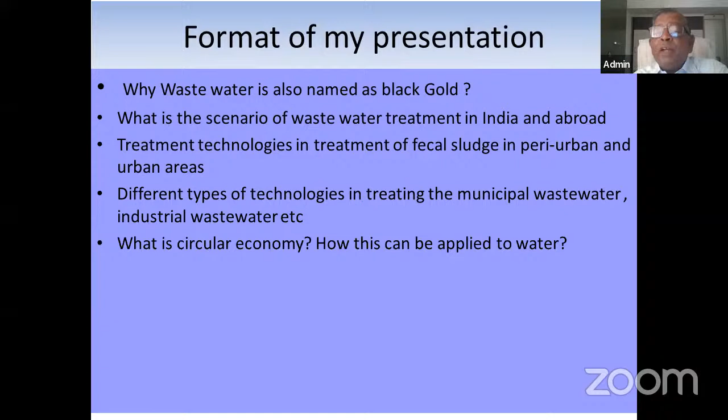So the untapped resources of wastewater: recovery of water, energy and phosphorus from wastewater. And case studies in India, USA, Singapore and other countries. I think I have just generally given you the gist of my presentation.

In this context it is necessary to understand what is the scenario of water, because water and wastewater go together. Without water there cannot be wastewater. In that context I have a few slides to show you the scenario of water, not only in India but all over the world, and how, in order to make good of this freshwater resource, wastewater can help us. I think that is the most important part of the whole exercise.

So let us understand: Mahatma Gandhi, as early as 1925, stated sanitation is more important than independence. You can understand how important sanitation is. Sanitation covers not only water but also wastewater and solid waste. These are the three important components of sanitation, which are really in a poor state of affairs in the Indian scenario.

So water is called liquid gold. Without water, nothing can exist, particularly living beings. Water plays a very vital role. Fresh water is more important because we need it for agriculture, industry and drinking water. So when water is called liquid gold, wastewater is called black gold. I think you are well aware of the water scenario.

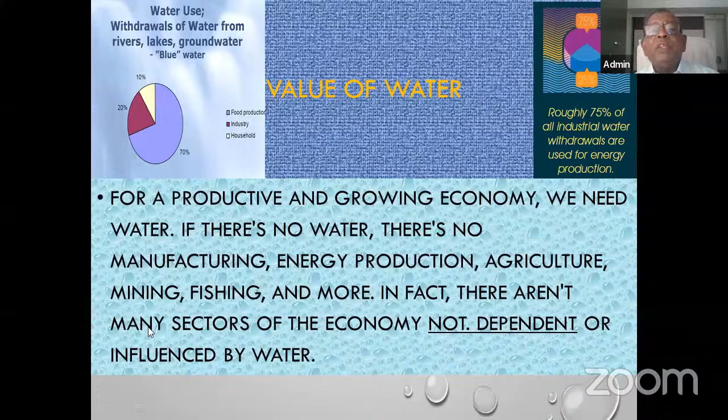Another important thing you can notice here is that in the industrial sector, roughly 75% of industrial water withdrawal is used by energy production. That means if 20% of water is used for industry, 75% of that 20% is used only for power generation. I think this is very scary. We have to reduce that usage of water. Perhaps you must have read a few years back that Cape Town almost managed to push back Day Zero.

Virtually, there was going to be day zero in the estimate when taps in the city could run dry. In 2019, after successful water saving efforts, they somehow overcame this day zero. See, that probably is a scenario in India, and we have seen that on many occasions. But in India, day zero has come and gone for residents in many parts of the country where taps failed long ago, and people have resorted instead to digging wells or buying water.

I think this is the scenario, and it is going to be. I think you must have read in papers: in Simla, virtually there was no water, and so many cities in India are lacking water. So let us come to the real sewerage system in India. Urban areas in India are almost invariably plagued with insufficient and inefficient wastewater facilities. That means, as I said, I will show you some of the scenario, wastewater is not being treated.

Even in Bangalore, this was only started late in the 1970s, and we have only provided primary treatment, and subsequently only in 85 we tried to have secondary treatment. Now things have straightened up, but over a period of time, wastewater has been given, in fact, a raw deal of not being treated. And today we are suffering for that.

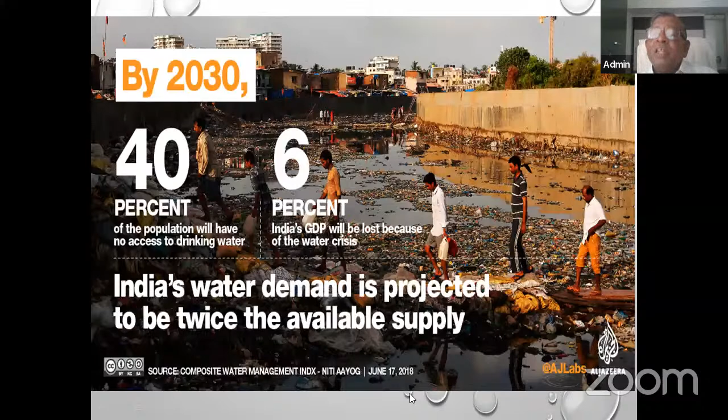Where do you get this water? That is what I am going to speak about now. The sources of contamination are point and non-point sources. What are point sources? Point sources are basically the domestic sector. If we don't treat wastewater and take it to a point and, without treatment, let it into the river, that is exactly what is happening from the domestic sector, and all industries are also a point source. We are just leaving it to the rivers.

Agriculture is a non-point source. Agriculture, forestry and fishing, this is again a non-point source. Runoff of rainwater is another non-point source. Storm water which precipitates on any urban area is carried away to the rivers with so much dust and all sorts of pollutants in it.

That is the non-point source. In addition, we have mining and quarrying, which is point source, and construction purposes. We are creating a lot of pollutants there too, and that is also a point source. So these are the areas where we are polluting the fresh water.

Resulting in all rivers in the country being in very bad shape. We have 5 important parameters where we classify rivers under A, B, C, D, E groups. None of the rivers fall in A, B, C group. They are all either D or E, because the DO content in rivers is very low compared to what is supposed to be in A, and the other parameters. So in that context, we have to seriously look at how this wastewater should not reach the rivers, so rivers become healthy.

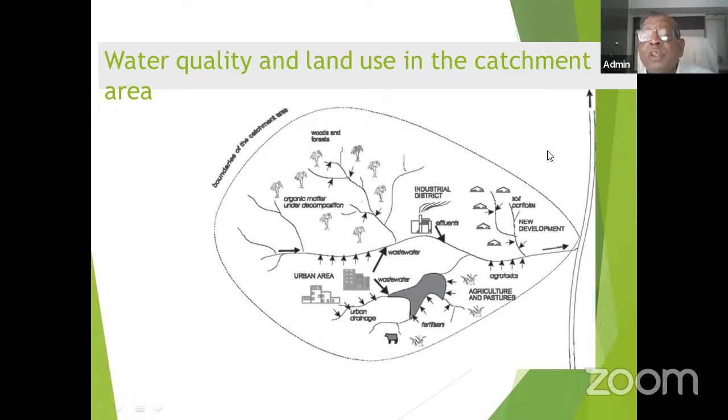Probably Ganga is doing something. I think for Ganga they have spent more than 2,000 to 3,000 crores in the last few years, and they are installing sewage treatment plants and also intercept and diversion networks.

Now coming back to the issue of how water from domestic usage - particularly groundwater or glacier water, which we are using, natural water - and even from the ocean, because most cities adjoining the sea have desalination. Nearly 121 countries have desalination projects. I think ocean sea water is becoming one of the water resources.

So the natural water utilized by municipal authorities - either for residential usage - is used for drinking purpose after treatment, and this drinking water again comes back as industrial and municipal wastewater. This wastewater is almost 80% of the water utilized, particularly in domestic, commercial, and industrial usage. And this 80% of wastewater has to be recovered.

Only then can we sustain water for the coming years. So how should it be treated? Treated effluent - we can have primary treatment, secondary treatment, advanced treatment.

With this, we can also go for repurified water - first treatment, second treatment, and then repurified water, even for drinking purpose. This has happened in many cities, and I am going to touch upon that. So this is the area where wastewater has to be recovered.

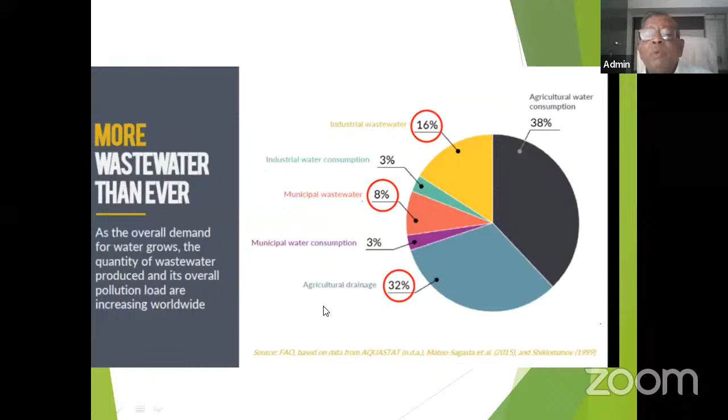Our water availability is fixed - it is finite. You cannot add one drop of water to the universe, or remove one drop. Overall, the scenario is we have a certain quantity of finite resource, and this finite resource has to be catered to more and more people. That is exactly what we have to seriously look at.

When you compare to other countries - Philippines is 1.4 billion, Vietnam is only 780 million, Laos is only 193 million, Cambodia is only 448 million, Indonesia is 6.3 billion. Indonesia is much worse, even though Indonesia is a small country - 6.3 billion.

This is a report released from several international companies together along with World Bank, on losses because of inadequate sanitation. The cost to India is 2.4 trillion rupees, equivalent to $53.8 billion lost - that means it is equivalent to almost 3 states' budgets. I think we must give this serious thought.

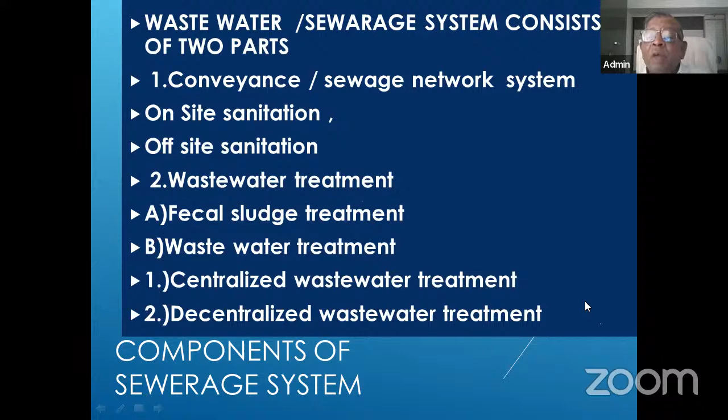They all provided decentralized wastewater treatment plants, ranging from 0.5 to say more than 5 MLD, up to 5 MLD. So we will come to this.

Basically what I'm trying to say is, in India only 30% of cities such as metros and class 1 cities have the sewerage system. The sewerage system has two components: one is the sewage network or sewer pipeline network, and second is the treatment plant. This encompasses the sewerage system. So the rest of the 70% still don't have a sewerage system.

They all depend on low cost sanitation, as I said, septic tanks, sanitary pits, community toilets, etc. There are three types of treatment: centralized, decentralized, and fecal sludge management, which I'm going to show you.

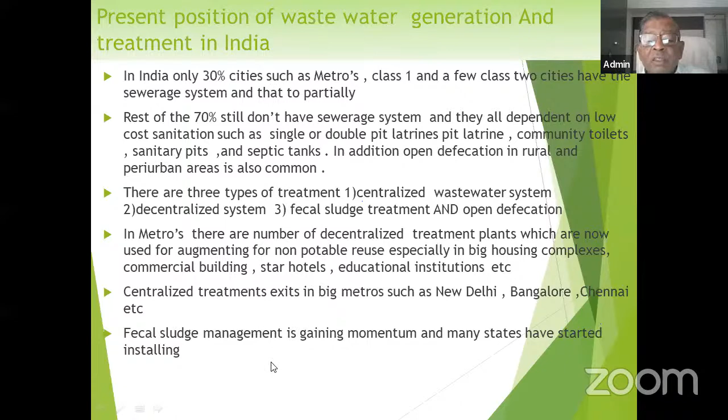In the metro, there are a number of decentralized wastewater treatments, see the big housing complexes, etc. And we also have fecal sludge treatment plants. This is a scenario of fecal sludge management. This has not gained much momentum, but from the last 3-4 years, it is taking bigger momentum.

We have three components: wastewater sewerage system, and open defecation, where we have to convey this sludge from each sewer pit and septic tank and treat it to the standards.

Coming back, this shows you sewered sanitation. This is the conveyance system of the sewerage network, and this is the treatment plant. In case of on-site sanitation, this is exactly the latrine, septic tank, and this conveyance system - tankers are sucking this from the cesspools and then taking the biosolids to the treatment plant.

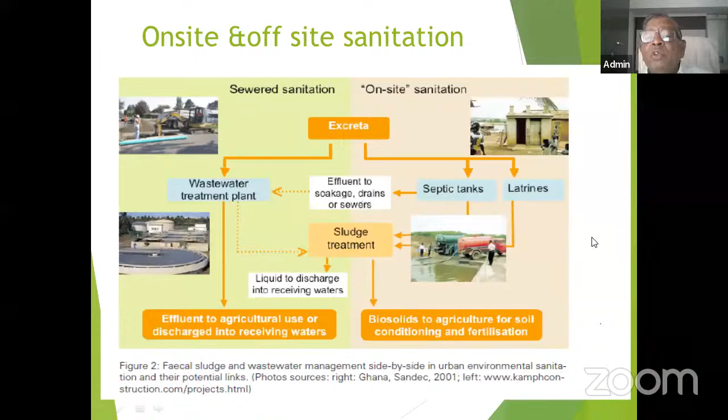A lot of states have already started this fecal sludge management in a big way, particularly Tamil Nadu. I was part of the advisory for that whole thing, and they are doing a very good job. The whole state will be taken up.

So this is a single pit, a septic tank, a dual pit, etc. Perhaps this must have been already taught some time back.

This is exactly what we have to really do: reduce open defecation, provide access to sanitary latrines. Then we have to go for a standard containment system to avoid leakages, and then safe collection and transport. This is a collection pit, and from here this truck is going to collect the settled septic sludge, and then it will be taken to the treatment plant.

Because that involves treating septage to safe levels and disposal, and ultimately the reuse products - maybe the sludge as well as the water - can be utilized for economical benefit.

This is another containment - a single pit, twin pit, conventional septic tank, urine diversion dry toilet. We also have septic tanks apart from sewage.

We have black water - that's what we call it. We also have grey water. Grey water, in the sense, is without toilet water - the rest of the things that can be collected is called grey water.

It can be treated very effectively within, because it doesn't have much contact with more pollutants, and that can be treated. Grey water treatment is also practiced in many urban areas - you can see it in Bangalore. Many of the hotels are going for grey water treatment.

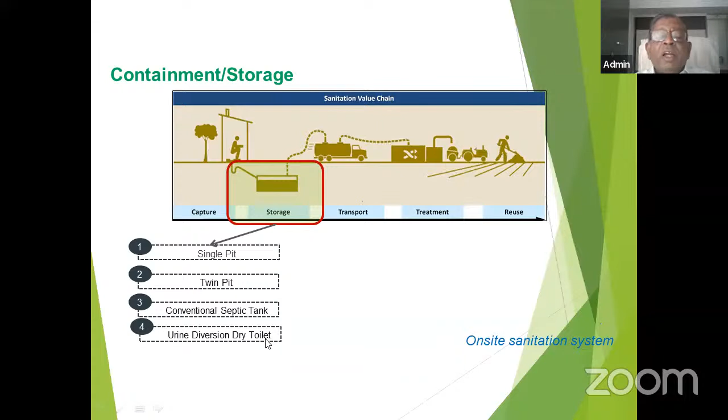We can also look at yellow water, just urinate water. Now things are coming up, even the sewerage and even the toilets are providing a separate unit for collecting yellow water, which has a high level of nitrate used for agriculture for better marketing.

In the sewerage system, we have two important processes in biological treatment, particularly aerobic process and anaerobic process.

Aerobic process is energy intensive, and the anaerobic process takes almost nothing or minimum energy, and even produces energy during the process. In this process we have activated biological processes. These are also called suspended growth, attached growth, and submerged attached growth. These are the three different types in the aerobic process. And in the anaerobic process also, we have suspended and attached growth. We are going to discuss those things in much detail.

Before we go into that, this is a holistic way of looking at the whole sewage treatment plant. Here we have low-cost wastewater treatment plants. Low-cost wastewater treatment plants basically take more land.

Sorry? So please go ahead, sir. No issue, because somebody has the cross. No issue. Please go ahead.

Okay, sir. We have anaerobic ponds and aerated lagoons. We have UASB plants, facultative ponds, maturation ponds, and wastewater storage treatment facilities. These were used before we invented technologies to take less area and treat more effectively. A lot of technologies have come in over the last 1.5 centuries. In fact, for the activated sludge process they recently conducted a centenary. This is one of the processes which was there for a very long time and still is there.

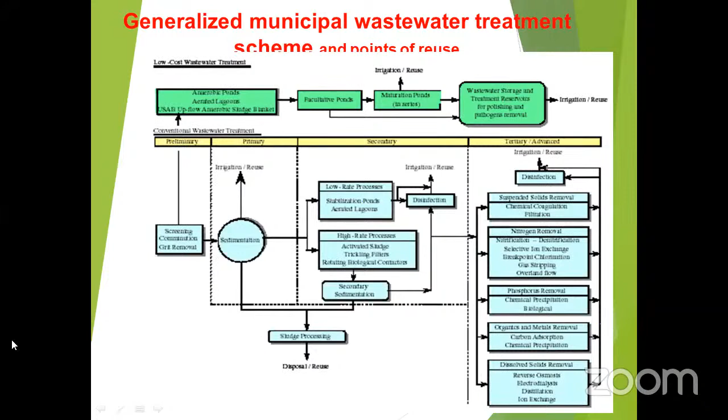Sir, please unmute, sir. Okay. Yes, sir. Hello. Yes, sir.

So in sewage treatment plants, we have preliminary treatment, primary treatment, secondary treatment, and advanced treatment. Advanced treatment is nothing but tertiary treatment. These are the 4 stages of treatment. I am going to discuss all these in the next few minutes. The preliminary treatment is screens and cutting, comminutors, etc. The primary treatment is basically a physical process where solids are made to settle.

The secondary treatment is basically a biological process, whether it is a low-cost process, activated sludge process, trickling filters, or rotating biological contactors. All these are biological processes. The tertiary treatment is a combination of chemical treatment plus biological treatment. Among advanced technologies is the membrane technology. I will discuss the different types of technologies that we are providing.

These are the existing discharge standards for sewage treatment plants. The Government of India is making them more stringent to improve river quality, and also for non-potable use and other uses. If you look here, BOD was 30 and they are now making it 10 milligrams per liter. Total suspended solids they are making 10, and COD, etc.

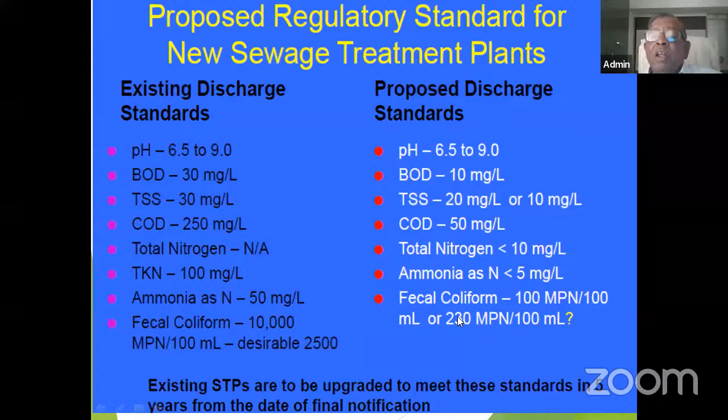This sludge is utilized by feeding it to the digester. We get methane, 65 to 70% of the total gas, which is very important for converting into energy, or even CNG and LNG. Today we can convert this biomethane into energy, not only in terms of electricity, but also in terms of CNG and liquid.

So all these days we are flaring up, burning that, and this methane is almost 36 equivalent: one unit of methane is equal to 36, because IPCC originally started in the 90s and they had methane equivalent to 26 units of carbon dioxide, but today it is 36.

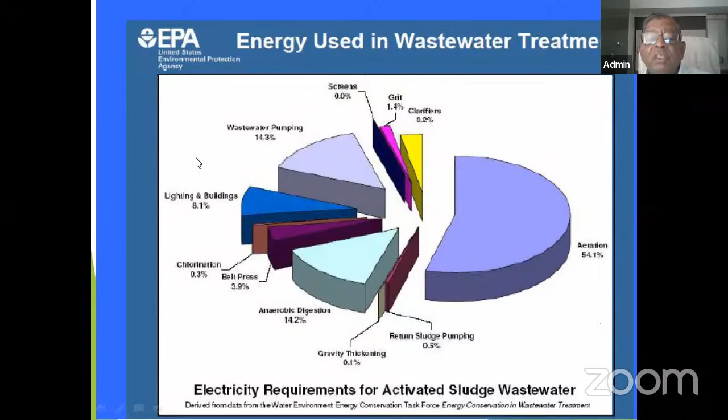So in the sewage treatment plant, the electricity consumption is like this. Secondary treatment, aeration, is the highest user of electricity, which is about 55%, and the rest goes to various other factors: anaerobic digestion, 14%, lighting of buildings, etc. Wastewater pumping, that is recycling of secondary sludge back into the aeration tank, is about 14%. So this is the general tendency of usage of electricity in the activated sludge process.

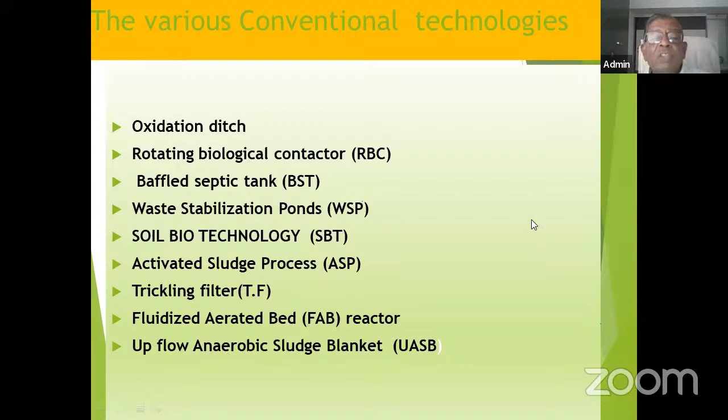Now, these are the conventional wastewater treatment systems which were there over a period of time. One is oxidation ditch; we already told you that is a low cost treatment which was there for a very long time. Rotating biological contactors, RBC, is another. Baffled septic tanks, waste stabilization ponds, soil biotechnology, activated sludge processes, trickling filters, fluidized aerated bed reactors, upflow anaerobic sludge blankets. These are the conventional plants which have been there for the last few decades.

But we are also looking at the recent ones which are now more effective, producing better quality effluent and also taking less energy. So these are the other plants that we are looking at. There are so many SBR plants; sequencing batch reactors are there in Bangalore and in many other places in India. More than hundreds of plants are SBR. In the last few years, the sequencing batch reactor is coming in a big way. Coming to the membrane bioreactor.

If people have gone to Cubbon Park, you must have seen the treatment plant there, MBR, membrane bioreactor, which takes only 25% of the space of a conventional treatment plant and produces high quality water. You can drink that water. That is the level, because we are using a membrane there. I will show you some of those slides.

Membrane aerated biofilm reactor, MABR. This is the latest technology; it has come only in the last 5 years. A few plants are already there in China, some in the USA. This is another plant where nitrogen can be removed and almost 90% of energy can be reduced.

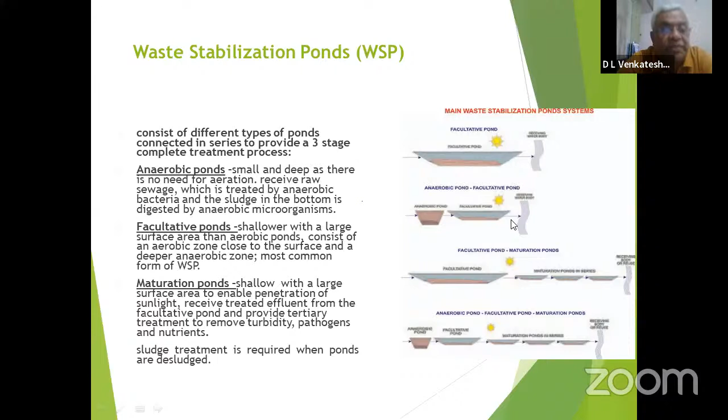So because, basically, if I go on explaining each one of them, it will take a lot of work, but I'll only tell the glimpses and we'll go forward. Is it okay?

So these are the waste stabilization ponds that have been there for a period of time. As I told you, this requires a large area of land. There are anaerobic ponds, facultative ponds, and maturation ponds. These anaerobic ponds are deep ponds, because the sludge is settled there, and thereby it needs no aeration. This is raw sewage which is treated by anaerobic bacteria. I think that is most important.

These are the three types of processes in most of the old treatment plants in urban and peri-urban areas. For example, if you go to Kolar or Tumkur or many other places, they have adopted only these waste stabilization ponds.

The only point is they require more land. I'm going to tell you the advantages: low cost, low maintenance, etc., and can be used for various types of concentrations. If you see the disadvantages, large lands are required, especially for maturation ponds, hence not suitable for large urban areas. Urban areas in the sense, I'm talking about class 1 cities and also metros. It is very difficult to get this type of land.

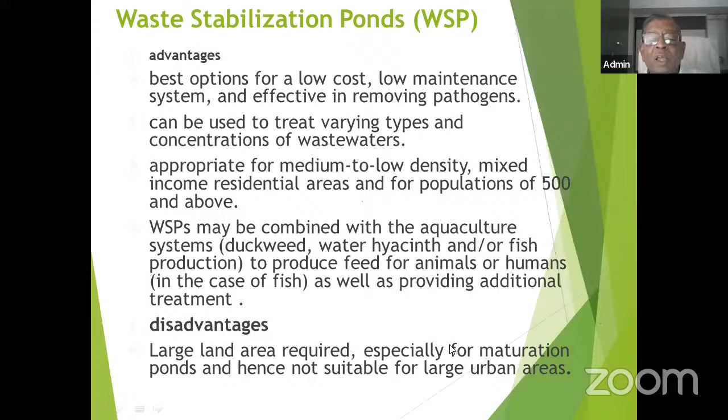So waste stabilization is combined with aquaculture, like duckweed, water hyacinth, etc., as well as providing additional treatment. This is the oxidation ditch, which you can see in ISRO. It was constructed as early as the late 1970s. A type of activated sludge process with long solids retention time. It is nothing but extended aeration, most appropriate for small communities. These oxidation ditches are still there in many places.

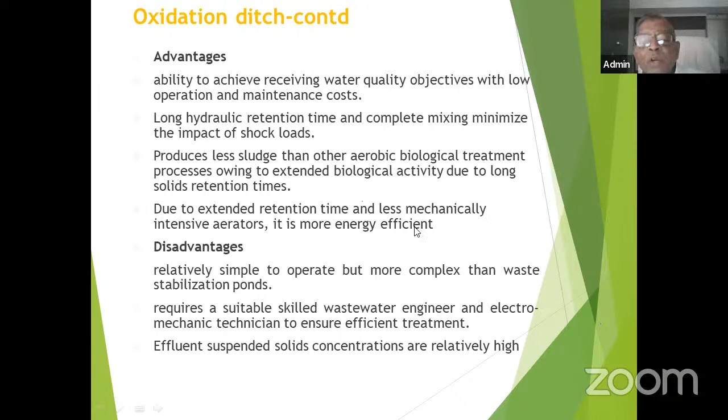Advantages and disadvantages: ability to achieve receiving water quality objectives with low operation and maintenance cost. I think this can be suitable for rural and peri-urban areas, and less mechanically intensive areas. Relatively simple to operate, but more complex than a waste stabilization pond.

Now, this is a plant which has recently taken shape. In the last 10 or 12 years, this soil biotechnology, SBT, has taken a very big shape. One of my friends from IIT, Professor Shankar, has invented this, and there are a number of plants in many parts of the country. I think this is very simple, and the advantages are many.

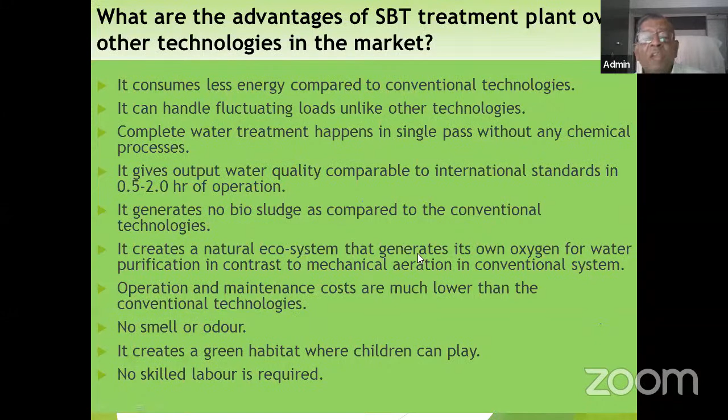It consumes less energy compared to conventional technology, handles fluctuating loads, and complete water treatment happens. The output quality is comparable to very high international standards. No smell, no odor, no skilled labor required, etc. This SBT has been installed in Bangalore, in Mumbai, and many places around. You can just go to Google and find the number of places these have been installed.

Now coming to the rotating biological contactor, RBC is an old technology. This also will be applicable only for small treatment facilities. It consists of discs, you can see the disc here, which will partially get into the sewage and come out, and the microbes will get oxygen when it comes to the atmosphere, and this will go on rotating with a very slow rotation.

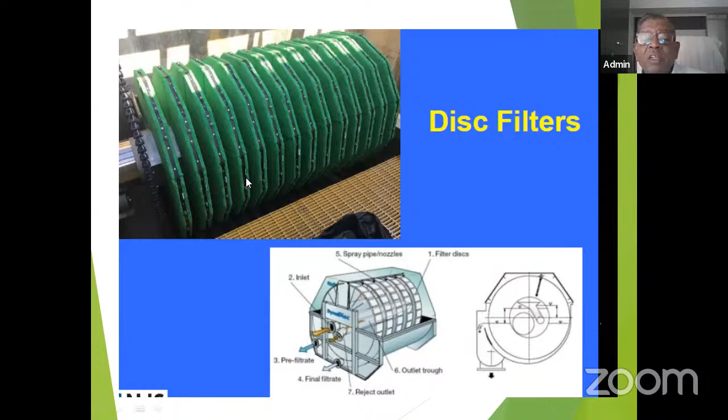These are partially immersed in wastewater, rotate slowly and allow active bacteria to digest, etc. There were many plants earlier; even in developed countries small plants still exist. This RBC is also famous in many areas. This disc filter is the same RBC, and you can see they have changed the system, the configurations, and they have made a better system.

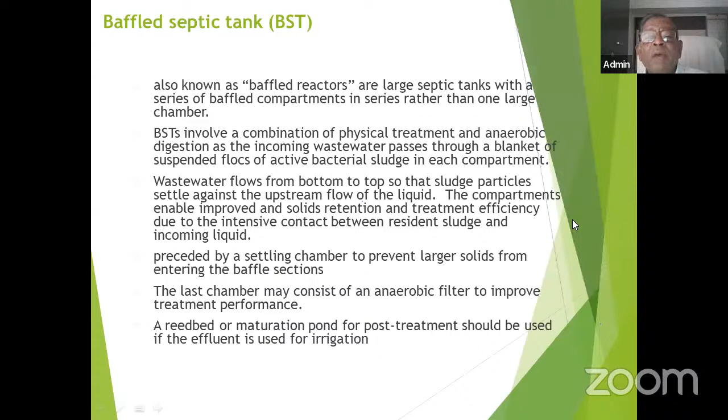So now coming to baffled reactors. This is nothing but a baffled reactor. Even in Bangalore, a number of layouts are using these baffled septic tanks. It will pass through several small chambers, and ultimately when it reaches the 5th or 6th chamber, the quality of water is so fine that it will be equal to the acceptable standards to let into the stream.

The treatment performance is lower during the 3 months startup phase, because the sewage has to settle, and then it has to overflow to the next chamber, and then the next chamber. This takes a while, creating a sludge blanket. That's very important.

Advantages are that it is suitable for wastewater including domestic, small community, isolated settlements. On Mysore Road I have seen three or four plants of this. This water is being used for non-potable uses like agriculture, car washing, etc. The limitations are that upflow velocity should never be more than 2 meters per hour, and the limited upflow velocity results in large but shallow tanks, so it is not economical for larger plants. Small plants up to 5 million liters capacity can definitely use this.

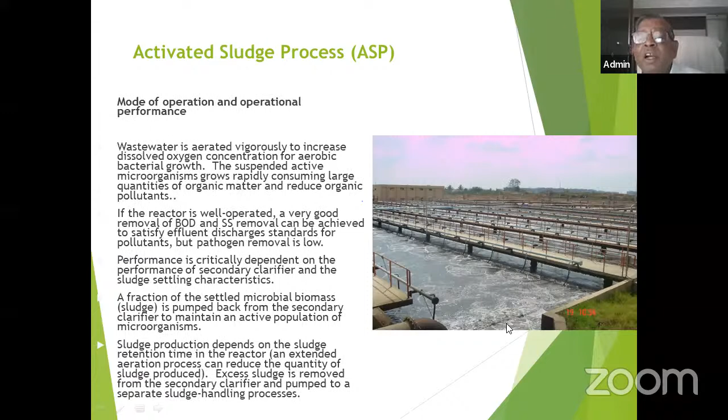Now there is a shift. This is the operation: the secondary sludge is recycled. 50% of the sludge has to be recycled into the biological process because we need bacteria to reduce the organic load. So a continuous supply of oxygen and sludge is essential, and regular maintenance is also required.

Limitations are that highly competent, trained supervisors are necessary to maintain it, whether surface aeration or diffused aeration, and high energy consumption, so recurring costs. Performance is affected by interruption of power supply. In the Indian scenario things are now slightly better; we are going for our own captive power, and today things are much better than they were. So the activated sludge process involves rapid mixing and aeration.

This is another one, the trickling filter, which is much earlier than the activated sludge process. This is attached growth; the previous one is suspended growth. The sewage, you can see here, is sprinkled on rock. The media can basically be granite, or it can also be plastic media, etc.

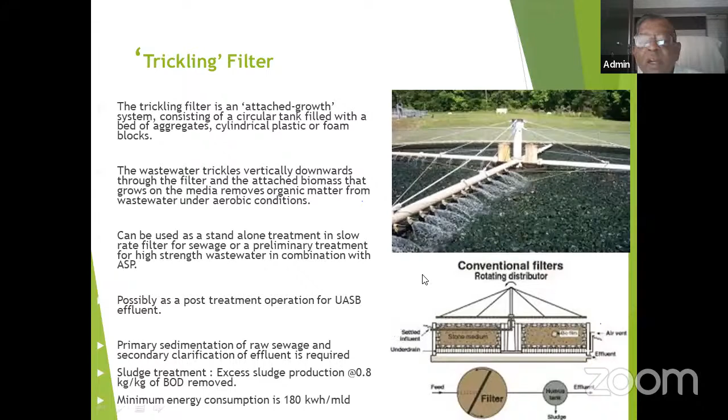That's why it is not being recommended in many places, but it is definitely one of the important processes used over a period of time. It is possibly used as post-treatment of a UASB plant. This can also be used depending upon the availability of land.

Trickling filter operation, rotating. So limitations, some of the common problems: increased growth of biofilm, improper design, changing of wastewater characteristics, equipment failure, mechanical breakdown, distribution arm blockage due to excess biomass, etc. So these are some of the problems that are associated with trickling filters.

And most importantly, flies, filter flies, that is called Psychoda, caused by inadequate filter media moisture, can be a nuisance. So here you can see a lot of Psychoda. When we installed it close to Rajeshwari Nagar, we have seen this plant. These filter flies are one of the common problems, and there was a lot of complaint from the neighboring people who are residing, and that is where this is also causing a lot of problem.

So, but see, this can take shock loads, and that can work, but the final effluent quality will not be matched with the activated sludge process. It can go up to only 90% of BOD reduction.

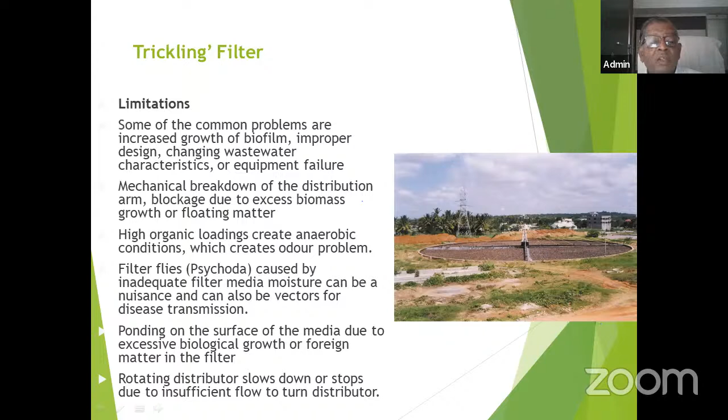So this is another technology. After the 90s, many plants were installed around Delhi and many other parts. Even now, in Bangalore also we have installed 2 plants earlier. UASB followed by activated sludge process. UASB is upflow anaerobic sludge blanket. Basically, this works for small plants, and secondly with a high BOD load, or COD load.

We have to create a sludge blanket, which is very important here, and only then there will be gas generation, which can also be recovered and converted into methane. The methane can be utilized, but unfortunately, the creation of a sludge blanket itself takes a while, and the quality of final effluent coming out of this UASB needs further treatment, which is going to be only 60 to 70% of BOD removal.

And if we have to go up to 90%, 95% removal, then we have to go to an additional treatment process, which is a biological process, and that is where we have such plants, 2 plants, and later on I think we have not built any. So 10 MLD plants, small capacity plants, have been installed, one in K R Puram and Nagasandra.

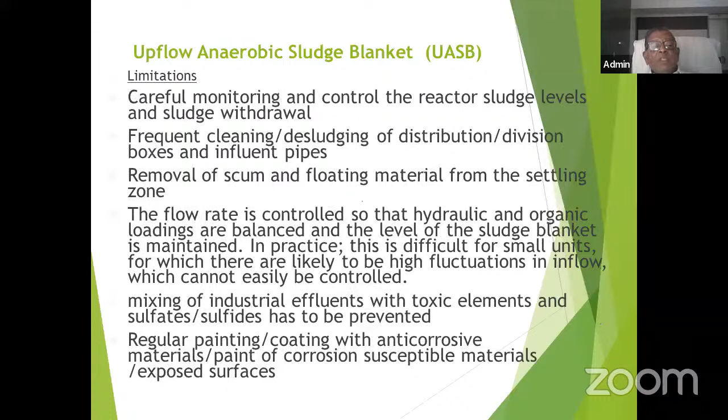So these are the limitations: careful monitoring and control of sludge reactors, frequent cleaning, desludging is also very necessary. Removal of scums, floating materials, flow rate is controlled, so the hydraulic and organic loading are to be balanced, mixing of industrial flow, etc. So that is about the UASB plant. UASB plants were installed under NRCP, a lot of plants around Delhi, because they found this is a better thing. But now not many of the plants are there because they cannot be effectively controlled.

So this is the SBR plant. You can see a number of plants today where SBR technology is being utilized. In Bangalore now more than 5-6 plants you can see here. Apart from that, BDA has constructed 1 or 2 plants here, I think. This can also remove nitrogen and phosphorus to a certain extent. That is one of the advantages.

The tertiary treatment which we are looking at, not against what is required, but it can remove to a certain extent nitrogen and phosphorus, which is detrimental, because when nitrogen and phosphorus are there with sunlight, a lot of eutrophication takes place, weed growth takes place. So nitrogen and phosphorus elimination is very necessary when you are letting into a lake or any water body. That is where SBR is taking over; there are many plants.

Recently I am told, I have a report, Bangalore has 35 sewage treatment plants. Out of that, about 5 to 6 plants are SBR. Improved aesthetics, separate units are not required. Even private, BEL has constructed one SBR plant recently, 10 MLD, and some of the corporates have constructed SBR plants, 5 MLD, etc. So this is a good process. SBR, sequencing batch reactor, is a very simple technology.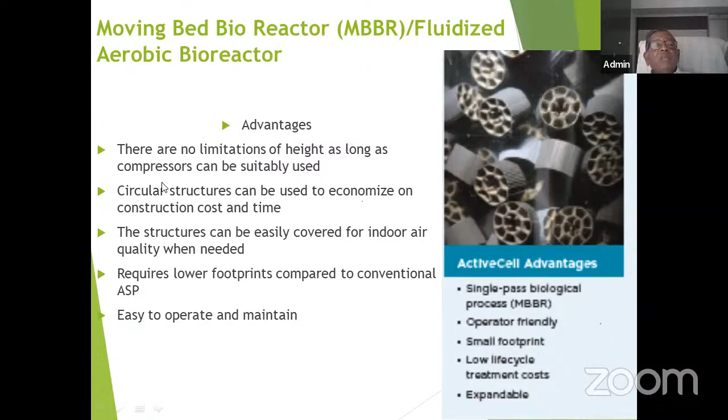This is a biofilm process. I think each country produces a different type of these plastic biofilms, and they are put in an aerobic tank, where organic matter sticks onto this, and gradually that will be sloughed off.

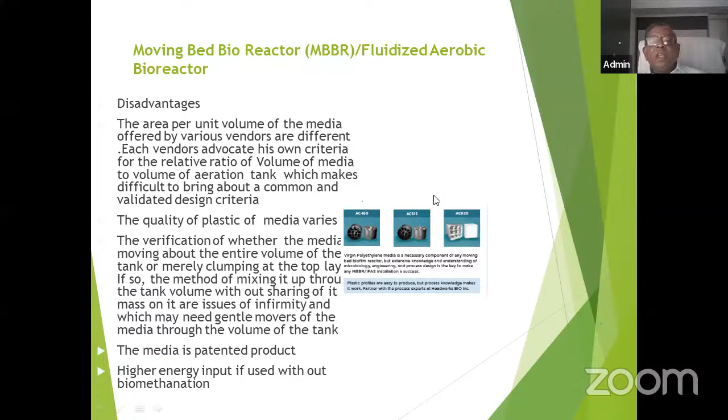This is MBBR, moving bed bioreactor with fluidized aerobic. Many plants in India and in Bangalore use it. If you look at various industrial areas, MBBR is very much used. Out of 2,600 plants in Bangalore, small capacity plants, almost 25% are MBBR plants, using plastic media inside.

This is a bioreactor, MBR. I told you now MBR is there in Cubbon Park, and Infosys has also installed it in both Mysore and Bangalore. This MBR plant produces a very high quality of water.

The only thing is, the primary treatment with screens is of very low capacity, removes most of the screening things, and directly gets into the aeration chamber, where we have to create a high level of MLSS concentration of 8,000 to 10,000. That aerated water is then put into the bioreactor, where ultrafiltration or microfiltration is provided, and the water coming out of this will be of very high quality, with turbidity levels less than 1 NTU.

You can visit this plant because recently in Cubbon Park, what was 1.5 MLD has been enhanced to 4 MLD, so we made it a bigger plant. This water is now supplied to Cubbon Park, Vidhana Soudha, Raj Bhavan, and also other adjoining places, because the demand was more, and we have enhanced the capacity of the plant from 1.5 to 4 MLD. Just now it is completed, and they are working for 4 MLD.

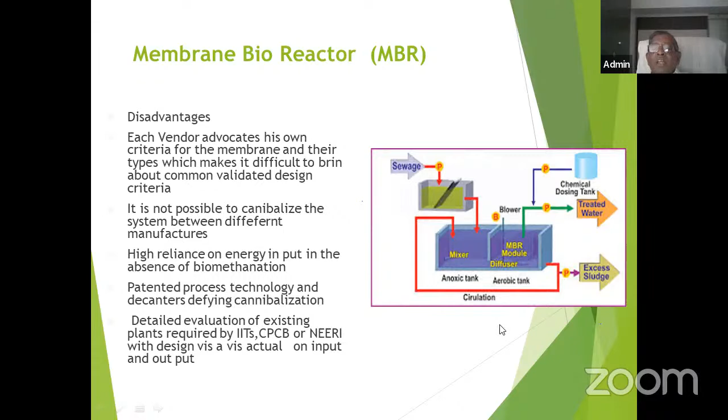For case studies, I told you about the 4 MLD capacity plant in India meeting horticulture requirements at Vidhana Soudha, Raj Bhavan, etc. There are 2 plants of 0.5 MLD in IISc, where I was the advisor, and today they meet all the requirements of their non-potable usages. Infosys has 3 MLD plants at Mysore and Bangalore campuses. These are the plants close by which you can see.

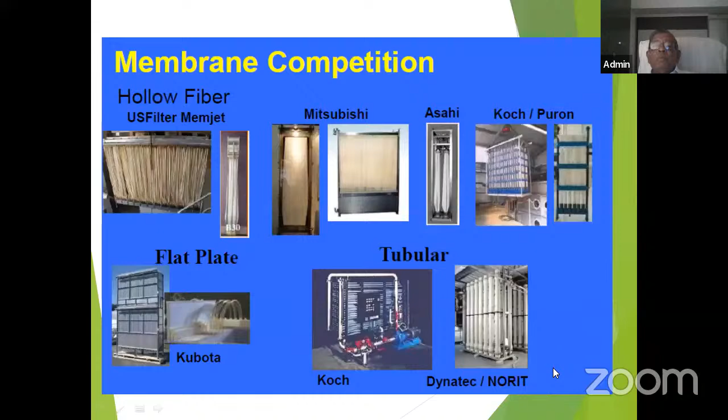So these are the type of hollow fibers you can see. I think this is ultrafilter, UF filters. These are the type of ultrafiltration filters. This small scale thing, and this is a Mitsubishi. Different companies make these: Memjet, Mitsubishi, Asahi, Koch. This is the Puron, tubular membranes. Flat plates - only one company makes this in Japan, Kubota. So Koch and others are the companies which make these. I think representatives are there in India for all these companies, which have been producing for more than 2 to 3 decades.

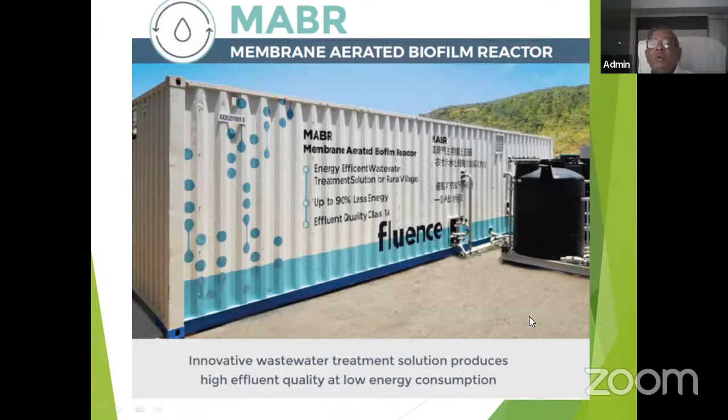So this plant is something you can see here. Energy efficiency in wastewater treatment is improved, requiring 90% less energy than conventional methods. Effluent quality is also better, as it removes nitrogen and phosphorus. So in this way, this is going to be significant. There are only a few plants in China and USA currently, but we are also trying to bring this technology here into India, in Bangalore. MABR is going to be the best technology. I think these are the details - you can see the features, benefits, etc.

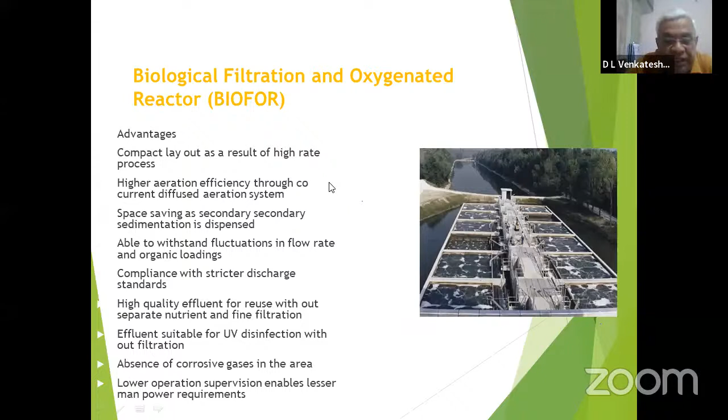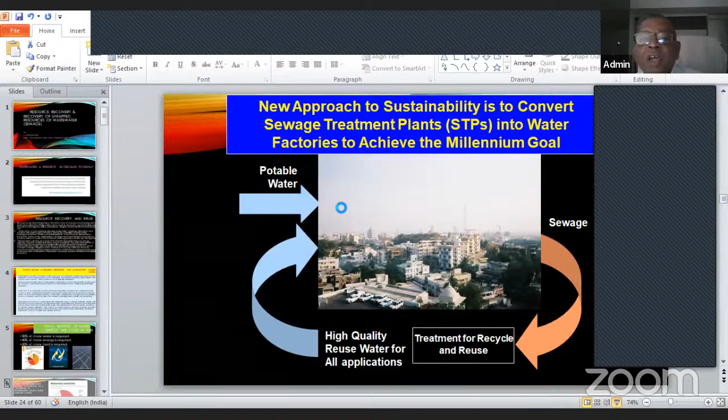Sir, now you check, sir. Okay, now I think I should get that. Yes, sir. Okay, so click on, yeah. Yes, sir. We are able to see, sir. You can go for full screen. What I'll do is, okay, you can present with this one, sir. We are able to, good, sir. Yeah, it is. I'll take another 25 minutes. Thank you, sir, thank you. Basically, I don't want too much of a burden.

Okay, see, this is exactly wastewater resource in circular economy. I think this is basically what I want, resource recovery, and recovery of untapped resources of wastewater. This is my real presentation. People will have to really look into this very aptly, because without this, in the days to come, there cannot be sustainability. So whatever the UN has said, wastewater resource recovery is a must in the days to come. In the world, demands of fresh water are continuously growing, where limited water resources are increasingly stressed due to over abstraction, particularly of groundwater and surface water.

So, what is linear economy? What is circular economy? All that we are going to discuss.

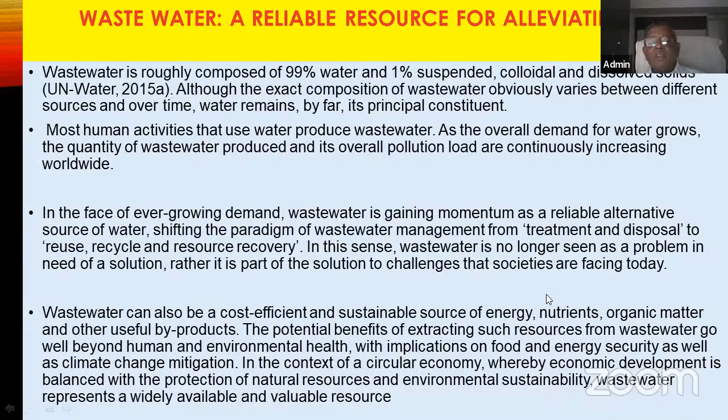Most human activities use water and produce wastewater. As our demands for water grow, the quantity of wastewater produced and its pollution load are continuously increasing worldwide. We already told you that worldwide, 80% pollution is still there because we are not treating the wastewater. In the face of ever-growing demand, wastewater is gaining momentum as a reliable alternative resource, shifting the paradigm of wastewater management from treatment and disposal to reuse, recycle, and recovery. So wastewater can also be a cost-efficient and sustainable source for energy.

What is most important is, by 2030, according to a UN report, 30% more water is required for the entire world, 40% more energy is required, 50% more food is required. For all these things, water is the origin - without water, there cannot be any energy.

Without water, there cannot be food. They are all in nexus. Water, energy, and food are in nexus. So you can see here, of course, renewable energy is going to be one of the very important factors, and renewable energy can also be made from wastewater.

So what we are talking about is integrated urban water management. I think the whole concept is, in the last two or three decades, all forms of water: potable water from sustainable sources like stormwater, rainwater, surface water, groundwater. And wastewater, so grey water, recycled water, etc. They are from wastewater.

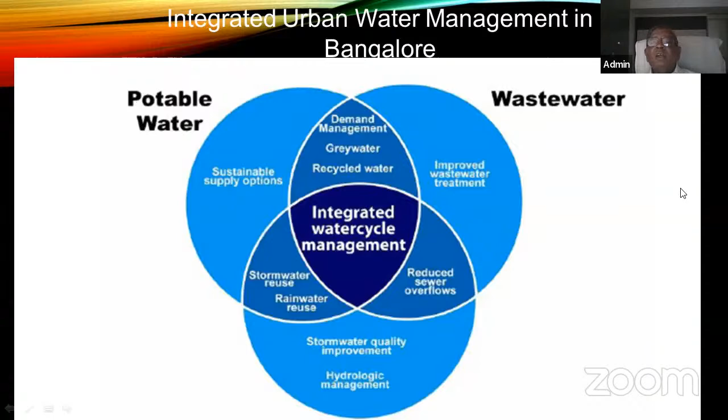And stormwater, basically stormwater quality improvement and all these things should improve. I think if we can use all these forms of water, we can become sustainable. But the higher version of integrated urban water management is the One Water concept. In the One Water concept, it is the same thing with additional infrastructure improvement, drinking water quality, etc., all built in.

So we are looking at the One Water concept, that is, the entire water, whether it is in the form of groundwater, surface water, wastewater, stormwater, or ocean water. All these have to be integrated if we are to really sustain in the days to come. Because 7.8 billion people are there now. By 2050, it is going to be almost 10 billion people.

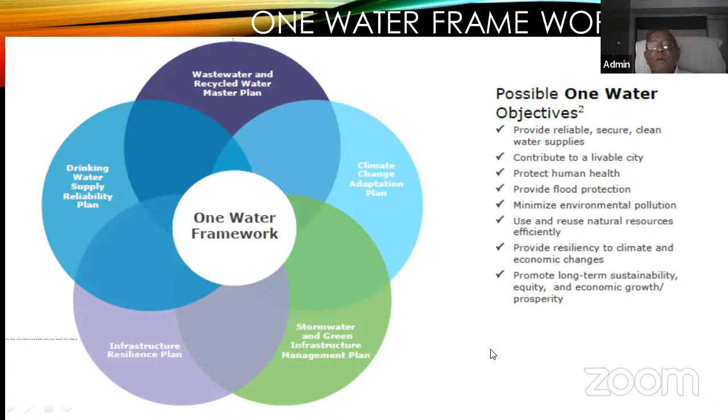River water and dam water you can use directly for drinking purposes. Domestic wastewater can be converted for drinking purposes. I will show you some slides where many cities are already doing this for drinking water, and it can also go for non-potable purposes, for industrial requirements, etc. Industrial water can also go directly to industrial users.

Together, stormwater is most important. We are not giving much attention to stormwater. We are only thinking of flooding and all that. But this water should be saved for aquifer recharging. It can be used for drinking purposes, for non-potable purposes, for industrial purposes, and lastly irrigation. So stormwater is given a raw deal as of today.

There are now many types of low impact development processes, green infrastructure, and China has come up with what are called sponge cities. So these are all things we have to do if we are to really contain and use stormwater and all forms of water. Less than half of wastewater globally is collected; only 20% is treated, 80% is not treated.

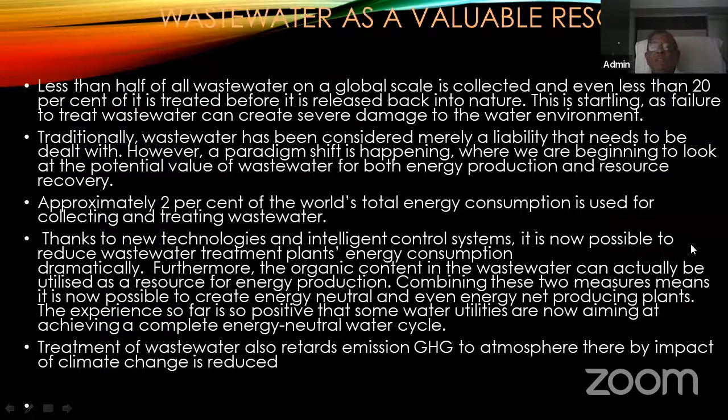This has a value. Today Bangalore is supplying water at 25 rupees per kiloliter to industries from Yelahanka. From the Yelahanka treatment plant, we are supplying to Wheel and Axle, to the airport, to the Air Force, to so many. So we can recover that water at a cost.

Similarly, you can recover energy. So today, Bangalore can be self-sustaining in energy for running the plants. We can recover phosphorus, which is very, very important. This is a very costly thing. Today, phosphorus comes from only 3 or 4 countries in the world.

So now there is a shortage of phosphorus everywhere. And in the last one decade, there is more than 600 times increase in phosphorus recovery. So from wastewater, we can recover phosphorus. I will show you some of the slides, how it is being done. 80% of the wastewater is still not treated. It should be treated as the most important resource recovery.

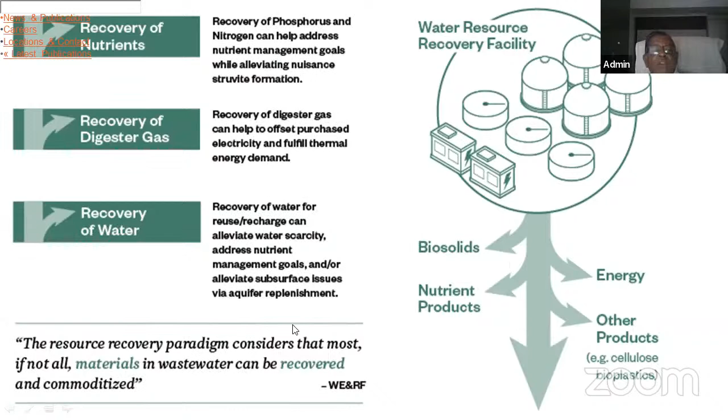So in the process, as I said just now, recovery of water is one of the very important things. Recovery of digester gas, from where it can be converted into energy, into CNG, LNG, etc. And nutrient recovery of phosphorus. So this slide shows you how the energy can be recovered, biosolids can be recovered, etc. So this is a paradigm shift. Consider that most of the material can be recovered.

I think this is a renewable source from where, as I told you, water can be recovered, energy can be recovered, nutrients can be recovered. This is resource recovery. So in the process, what we are going to get is by selling this biogas or electricity, sale of carbon credit, you can get tipping fees. Today, all this food waste is collected, and they are getting a fee, particularly from the public.

Savings: using own generated electricity, you are going to save money. Revenues can be from treated wastewater, as I told you. I have just now seen in Surat, they are selling at 30 rupees per kiloliter of treated water. In Chennai, long back they were supplying to Madras Refineries and Madras Fertilizers. Now it's supplied at a cost of 40 rupees per kiloliter. You can also save in discharge fees.

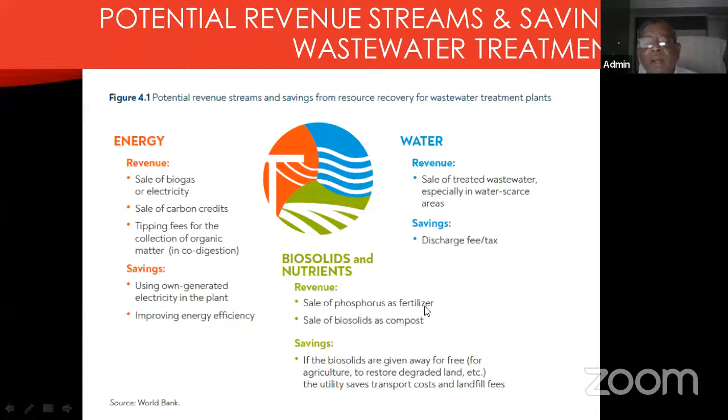You can also gain from the sale of phosphorus. As I told you, phosphorus is a fertilizer, and phosphorus is virtually not available in many countries. It's a very scarce resource. We can recover this resource from the biosolids. So with that, what I am trying to say is circular economy. Resources are being used and ultimately water is discharged. You are not recovering this water. After treatment, you are only discharging into the river.

Instead, you can have production, distribution, consumption, and resource recovery and recycling. So thereby you will get not only water, but also the biosolids, etc. And you can make money. So with all this, it can be a profitable job rather than a burden on the institution. For that you have to spend a little, but the governments can support these sort of things. Circular economy is most important because water is a scarce commodity. In days to come, we have to seriously look at circular economy.

Circular economy is regenerative by intention and design. It is an economic system aimed at minimizing waste and making the most of the resources. The traditional approach is based on a linear economy: make, use and dispose. The circular economy approach replaces the end-of-life concept with restoration, shifts towards the use of renewable energy, eliminates the use of toxic chemicals, etc.

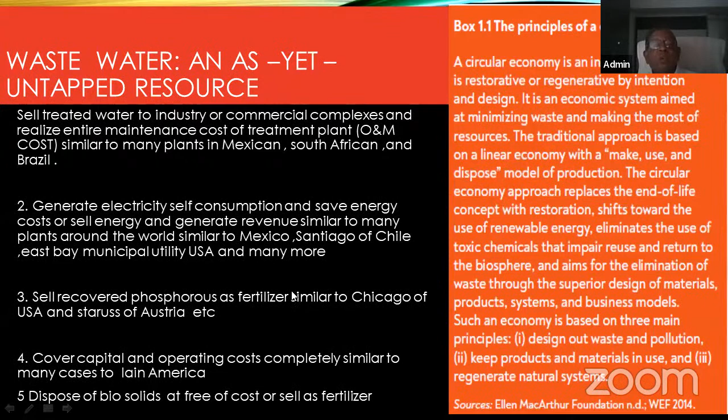This is exactly what we are thinking of. Water reuse is economically feasible and attractive when there is a potential for cost recovery in treating wastewater to water quality standards acceptable to users. So this is exactly what I want to show you.

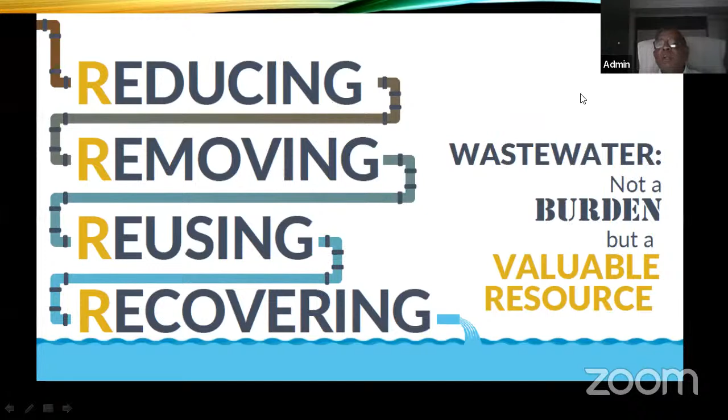And the 4 R's, which are reducing wastewater, removing the pollutants, reusing this water, and recovering the untapped resources like energy, etc. Wastewater is not a burden, but it's a valuable resource. That is why they call it the black gold. So prevention or reduction of pollution at the source: when you are reducing the pollution, automatically the wastewater produced will be reduced.

Removal of contaminants in wastewater streams should be done in the operational systems. The use of wastewater and water reuse, safe treated and untreated wastewater under controlled conditions for beneficial purposes, historically used primarily for irrigation. Wastewater treatment technologies now advanced allow the use of treated wastewater for all uses, provided that the level of treatment and quality of effluent are fit for purpose.

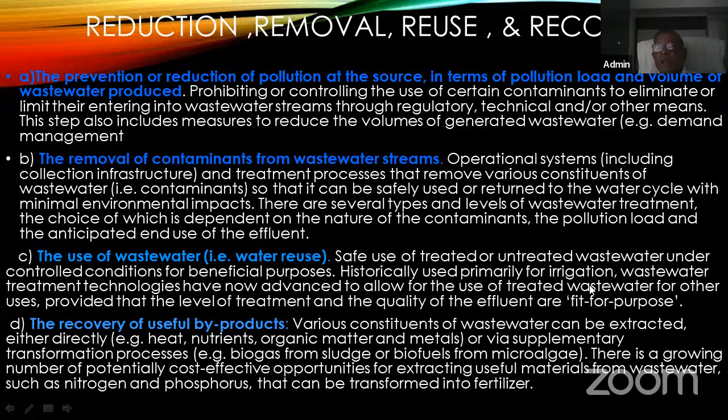I think you have seen the video which can clearly tell you, you can use it for all four purposes. One is agriculture, second is urban use, third is industrial usage, fourth is potable reuse. And lastly, the recovery of useful byproducts. I told you about biogas, sludge, and biofuel from microalgae. These are some of the very important things.

The first one is reducing and preventing pollution at source. Pollution prevention and the minimization of wastewater flow is the one. We should not throw all sorts of things into the wastewater. And this is again a treatment of wastewater where you get clear water and the byproducts of biosolids, nutrients, biopolymers, unrecoverable waste residuals, and energy. I told you about how methane can be converted to energy.

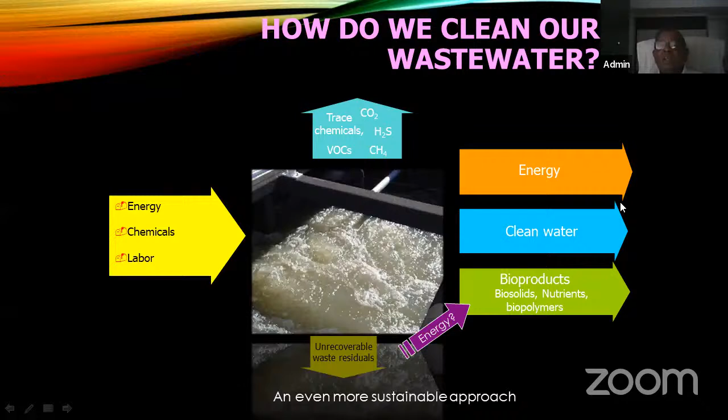For treating this water, we use chemicals, and these are the gases which are coming out. For treating this wastewater, we need energy, chemicals, and labor. So this is a total approach. These are the benefits, even carbon dioxide, hydrogen sulfide, methane. A maximum of 67 to 70% methane is generated, and we can increase that by adding cogeneration. So these are the byproducts: biosolids, nutrients, biopolymers, etc.

From the collection point of view, this is something very important. The sewerage system encompasses these two things: one is the conveyance system, and this is the treatment process. And as I told you, centralized versus decentralized. Prior to the 1960s, we were only going for centralized, taking the entire sewage out of the city because it was creating a lot of nuisance.

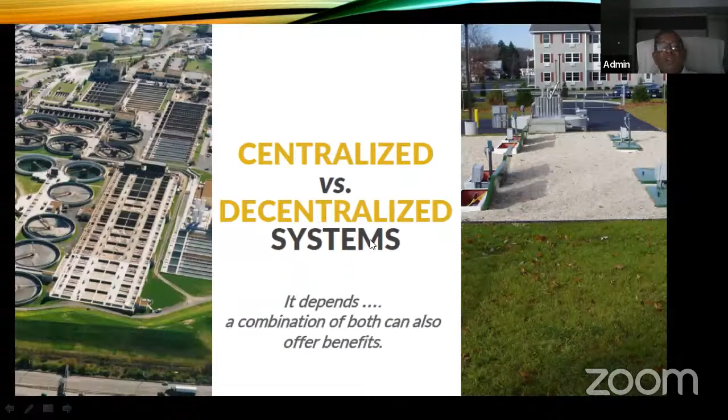And decentralized plants are smaller capacity plants, maximum about 20 to 30 MLD. These plants are very much there, and we are using various types of technologies which make reusing that water very beneficial, and it can also be used for various other untapped resources. So sewage treatment plants and water factories achieve the millennium goal: treatment, recycle and reuse, high quality reuse water for all applications. What are those applications? Industrial applications, agriculture usage, groundwater recharge.

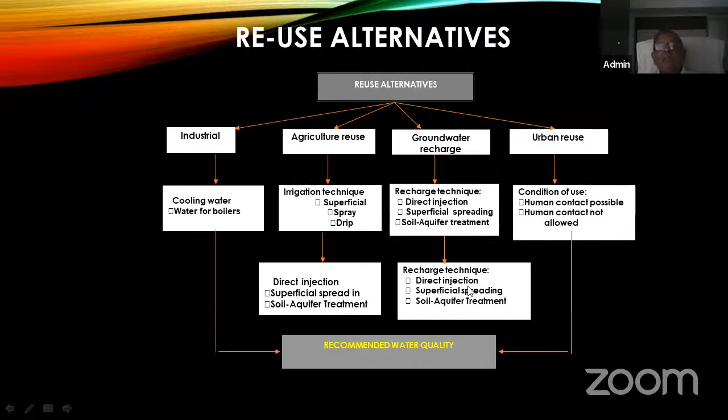Even groundwater recharge: I have seen many plants in Australia and California where they are putting highly treated water back into the confined aquifer, and after some time they recover it and use it for drinking purposes. This is managed aquifer recharge, MAR. Urban reuse: you can use it for golf courses, gardens, car washing, whatnot, most purposes in urban areas. And lastly, you can also go for reuse of water for drinking purposes, which I will show you.

So what are some of the cases in other parts of the world? Of 32 billion gallons of municipal wastewater effluent discharged in the US, roughly 7.3% is reclaimed, and now it is going to be very high. Israel uses more than 85% of wastewater, and today they are the pioneers in agricultural usage. By the end of this decade, I think they'll go up to 90% water reuse for agriculture.

Singapore uses 35% of their wastewater for drinking purposes, and that will go up another 15% by 2040. Australia now uses 20%, with a national goal of 30% by 2020. Spain recycles more than 15%. The USA has many big projects, more than 180 plants for drinking purposes. Projects in Florida, California, Arizona, Texas, and Nevada are going for indirect and direct potable use. What is direct and indirect potable use? I will show you in the next slide.

See, this is a planned direct, indirect potable use. What is being done in Singapore, what they have done in Brisbane, what they are doing in many parts of the world? I think this is indirect potable use.

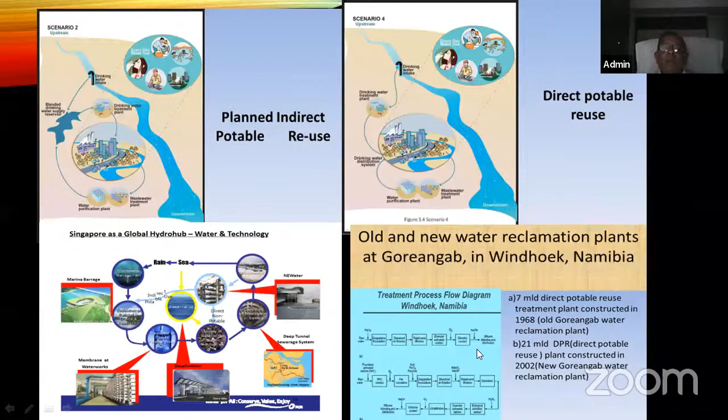A direct potable reuse. So they are not treating or putting back into the lake because they don't have any lake or any surface water resources. So they are only blending it with some quantity of groundwater and using it for drinking purpose. See, this is an example for us, how people have to realize that they have to think of this.

This is a case of Singapore where the 4 taps are there. One is they are getting some water according to an agreement, but they have reduced that supply from what was originally supposed to come. That is tap 1. Second tap is from the wastewater which is generated. They are treating 35% and bringing it. The third tap is from desalination of seawater. The fourth tap represents the storm water that is put back into the lakes and is being treated and supplied.

So this represents 4 taps for getting 1,500 million liters of water to Singapore. We are banking on Kaveri only in Bangalore for 1,450 million liters. But they have these 4 taps which are supplying and making them sustainable.

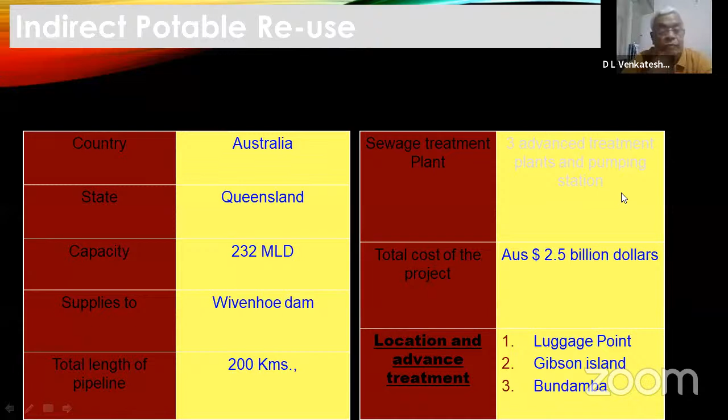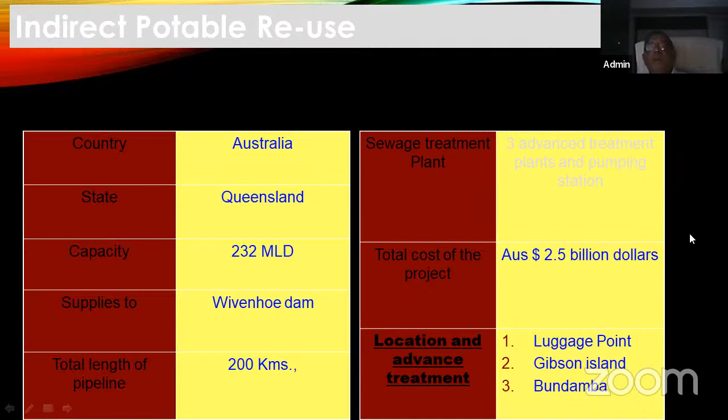These are the 3 sewage treatment plants from where the sewage is collected and treated with advanced technology, microfiltration followed by reverse osmosis. They are supplying to some of the power projects as well as for drinking purpose, putting back into the aquifer, indirect potable reuse.

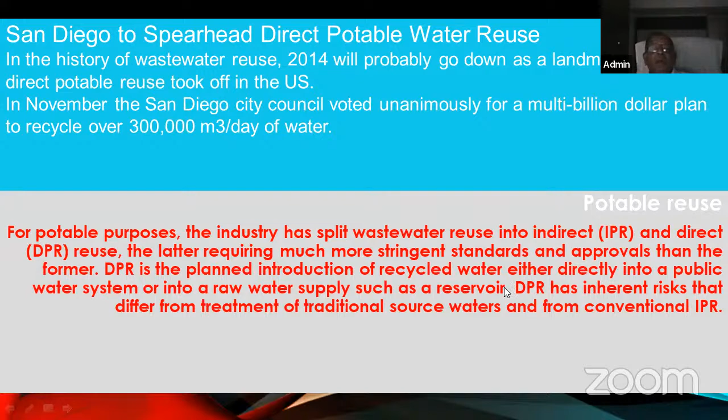So now San Diego has spearheaded, and history will probably record 2014 as the landmark year when direct potable reuse took place in the US. This is 300 million liters, a very big project. Direct potable reuse has been done in San Diego, and similarly in Texas. DPR, direct potable reuse, and you can go for aquifer recharge. This I have seen in Orlando, 202 recycling plants.

They are putting back into the aquifer. They also grow orange gardens. Together they are putting back into the aquifer and again taking it back and using it for drinking purposes. So there are many such plants, groundwater recharge and use. In California there are, and not only in Perth, there are 2 plants. So likewise, there are many plants.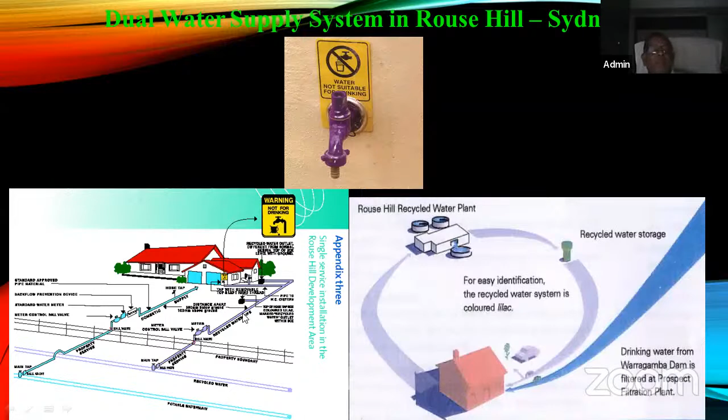I have seen this in Australia, in Sydney, where the new housing project has recycled water plus fresh water. Fresh water comes from Warragamba Dam, which supplies almost 90% of Sydney, and the recycled water is also supplied. They have a separate two-pipe system with special taps outside for recycled water. This is used only for car washing and toilet flushing. Almost 40 to 50% of fresh water usage is supplemented.

This is a plant which I recommended and advised to the Indian Institute of Science, Bangalore, which has been running for almost 12 years. Recycled water is supplied to all the departments and also to the Gymkhana grounds, etc. They are very happy with the recycled water. This is exactly what can be done with recycled water for non-potable use.

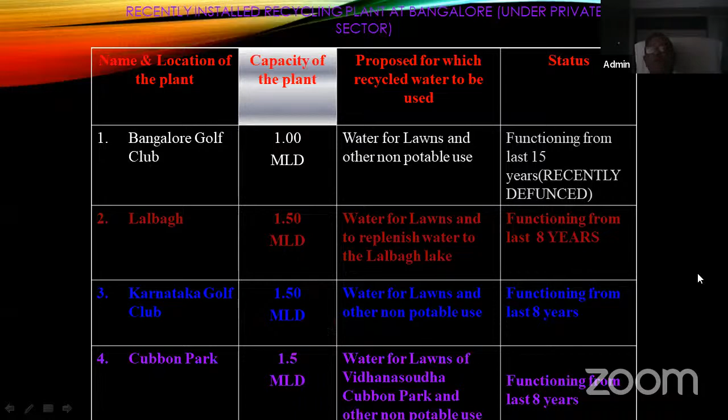Bangalore has, as I told you, a 1 MLD plant at Bangalore Golf Club, a 1.5 MLD plant at Lal Bagh, and Karnataka Golf Club. Apart from this, there are 2,600 plants of various capacities in different parts of it. Bangalore has also embarked on one indirect potable reuse project from Vrishabhavati Valley, where 150 MLD of water can be tapped, treated to a high standard, and put back into the Arkavati river course, where Thippagondanahalli has stopped getting water for more than 2 to 3 decades.

If we can mix this treated wastewater in, we can again treat it and supply it to people. This indirect potable reuse project is on the anvil, and the government should seriously think of implementing it, because we are short of water in Bangalore.

As I told you, these are all the indirect and direct potable plants, 180 plants. You can see here, because the south of North America is very burdened, they are facing a tremendous shortage of water, except these areas, particularly because there are 5 lakes, Michigan, Erie, so these can get water from the lakes. But these are the places with tremendous shortage: Florida, Texas, California, Nevada, Arizona, etc. Everyone is going for indirect potable reuse and direct potable reuse.

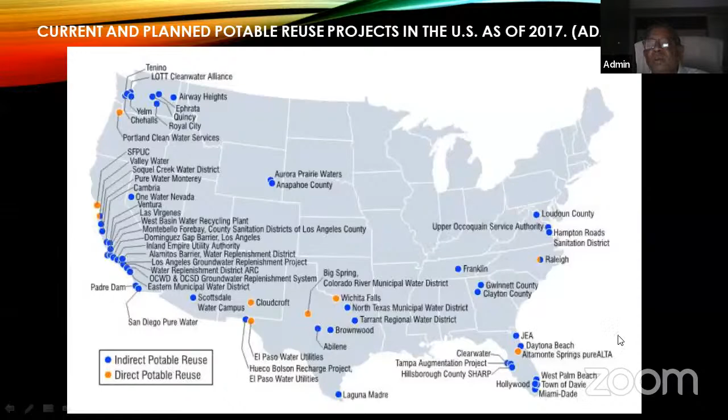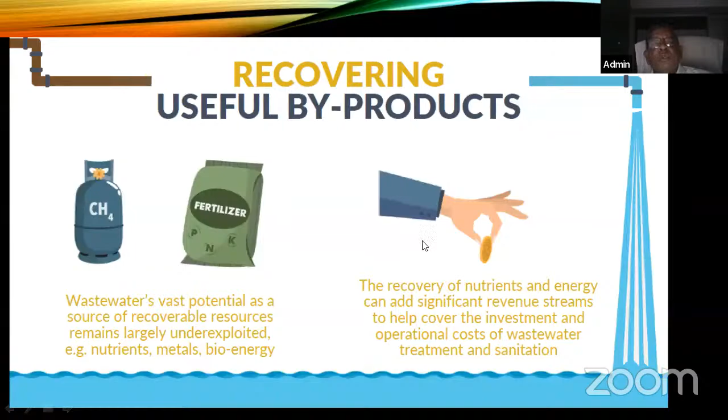The third point is resource recovery, recovering those useful resources. Today you can see from the Koramangala Challaghatta Valley, the treated wastewater is supplied to the Kolar area, including Chikkaballapur. A lot of secondary treated effluent is filling up 126 lakes in Kolar, where they are very happy; their borewells are recharged, they're using it for agriculture, and the lakes are very well managed.

That is for agricultural use. I am only giving an example. There are hundreds of examples, in Australia and all parts of the world, using it for agriculture. This is the case of Nagpur, where 100% of the wastewater is now treated and used for power generation.

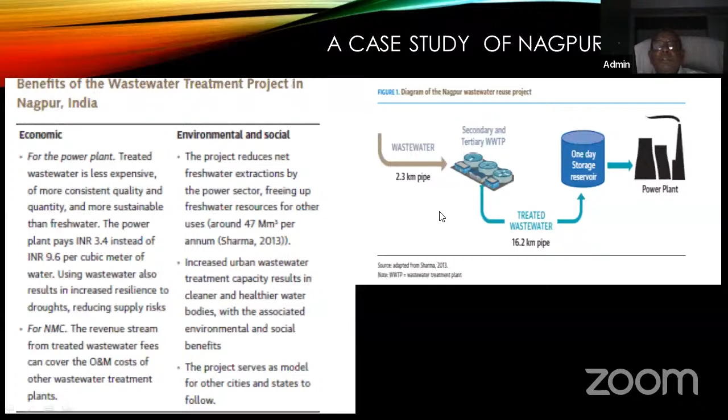After seeing our projects, the present transport minister, who came as president of BJP, immediately asked Nagpur people, since he resides in Nagpur, to go and look at our projects. They did this, and this Nagpur plant is now getting 100% wastewater recycled and using it for power generation.

Power generation is again through biogas, biomethane generation, etc. This shows how wastewater from the city can be recovered through wastewater treatment, and biogas can be recovered, where CNG and LNG can be created.

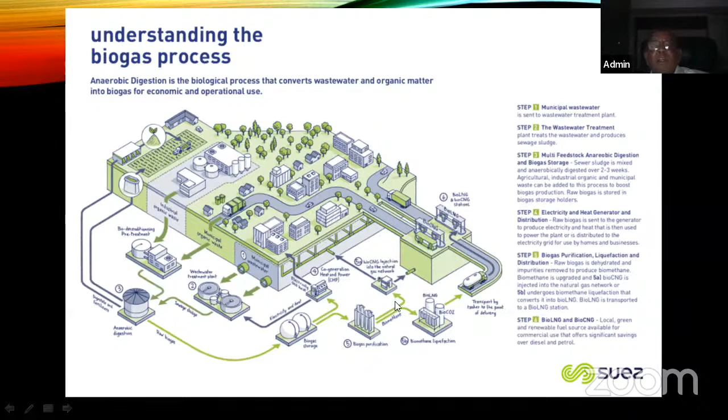The CNG produced can be used similarly for running a tractor, running a car, etc. These steps show how in all these places biogas is converted into CNG and LNG and used. So these are some examples where plants are 100% energy neutral and beyond.

Beyond means they are recovering and generating more power than required and putting it back into the grid. The Blue Plains plant in Washington - earlier I visited in 1998, they were not generating any power. Now today they are generating 10 megawatts of power.

East Bay Municipal Utility District in California - Oakland, California produces twice the power required, and the rest is exported to the grid. This is EBMUD in California, generating double the requirement.

This is beyond zero. Then the wastewater treatment plant in Aarhus, Denmark produces 50% more than the requirement, and they put it back into the local grid. So there are such plants in many parts of the world.

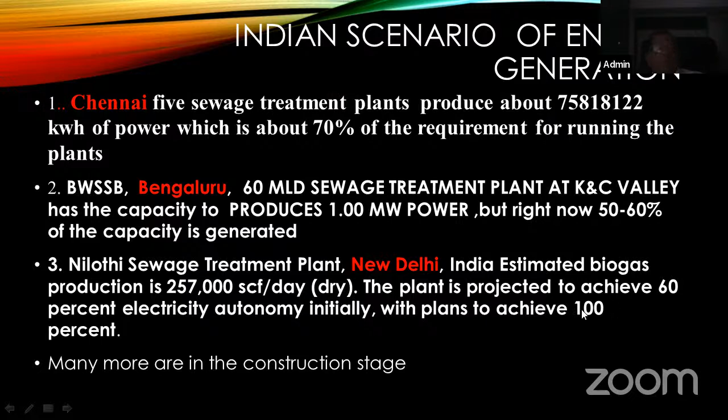Bangalore is one plant producing 1 megawatt of power. The Nilothi sewage treatment plant in New Delhi is also trying to go for 100% production. Many more are in the construction stage. In the Indian scenario, this plant in Bangalore has a 1 megawatt power plant putting back power. There are 5 plants: Koyambedu, Nesapakkam, Perungudi, and Kodungaiyur.

These plants produce a huge amount, recovering almost 5.5 crores worth of power recovery - to that extent, money is recovered. So these are about phosphorus.

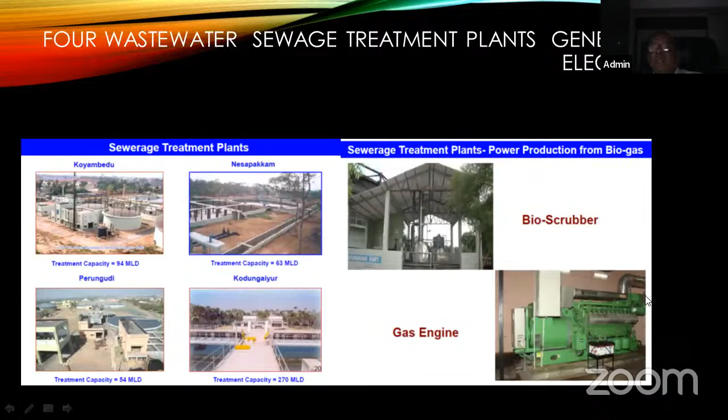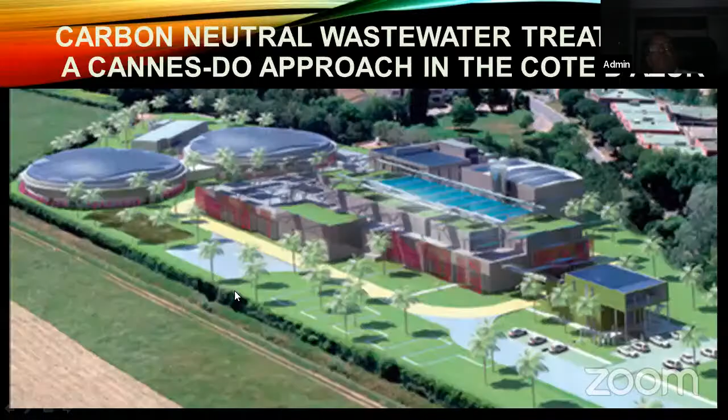This is another very interesting example, an 80 ML capacity plant in Cannes, a place you may have heard of, where every year regularly this happens. This plant is 100% carbon neutral, in the sense they use only solar energy.

You can see here, on all their units they have placed these solar panels. This is unique in the whole world, where a plant of this capacity runs without any external electricity. So the final message, the take-home message, is what?

Wastewater is increasing worldwide, and the vast majority is released without treatment. Affordable treatment options are available. This is a reliable and sustainable source of water, wastewater. That is the most important point, and it's also a sustainable source of energy, nutrients, and other recovery byproducts that have to be developed.

In a circular economy, wastewater use and byproduct recovery can generate new business opportunities while helping the finances of sanitation services. The costs of wastewater management are outweighed by the benefits in terms of human health. This is essential to achieving the 2030 Agenda for Sustainable Development, with the 17 parameters the UN has specified. If you can do all these things, you can easily achieve that. This is my last slide.